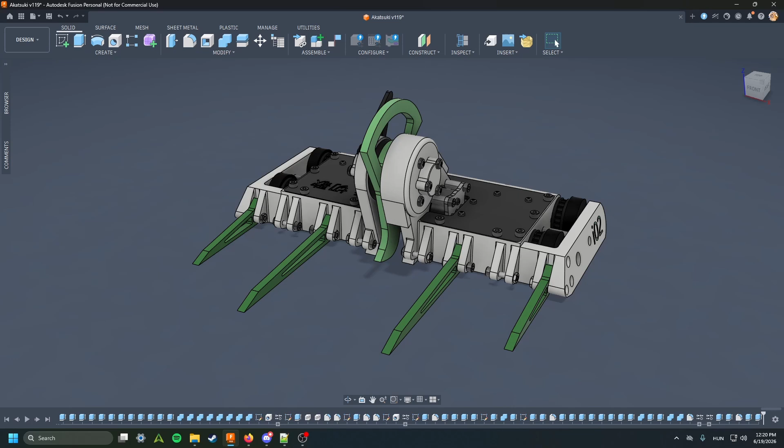Before the details, an important clarification. This robot will be competing in Europe and the United Kingdom, so it is designed to fit the 1.5 kg weight limit. It is currently in the process of being built, so everything showcased in this video is subject to change. So with that out of the way, let's get to the design.

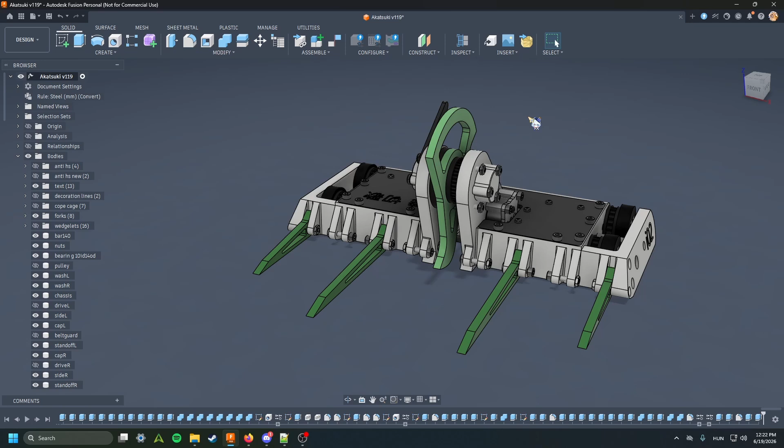Akatsuki is a 4-wheel drive vertical spinner featuring a decently wide wheelbase with a bar-style weapon. The effective diameter of this weapon is 140mm at a 6mm thickness. The material is laser-cut Hardox 500 and it features 2-axis asymmetry. Let's take a look at the weapon from a little bit closer.

Here we go. This is the weapon isolated. This is the side profile of the weapon. It features quite a big rake angle. This is to maximize bite and engagement from this weapon. As you can see also on the backside of the tooth, I have a pretty big fillet here. This is to minimize the chances of horizontal spinners catching the back of this weapon.

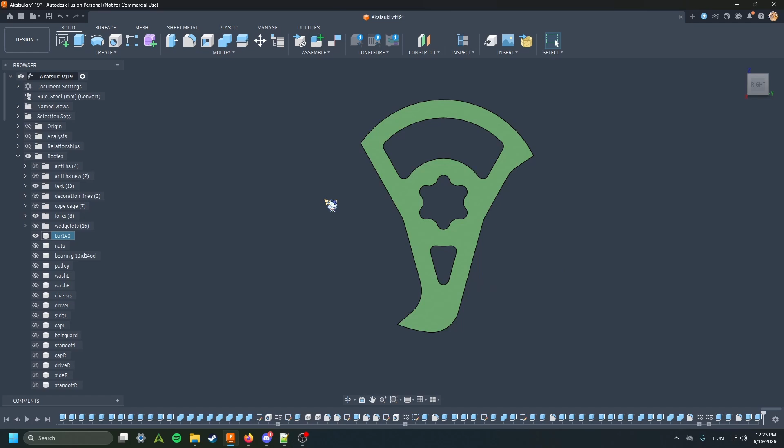Let's take a look at the rest of the bot again altogether. As you can see, the weapon sits between these two pieces here. This is a 3D printed pulley. This will be printed from nylon. Same thing here on the weapon motor. Both of these will be printed out of nylon. And this is to hold all the nuts for the 6 screws that hold the entire weapon hub together.

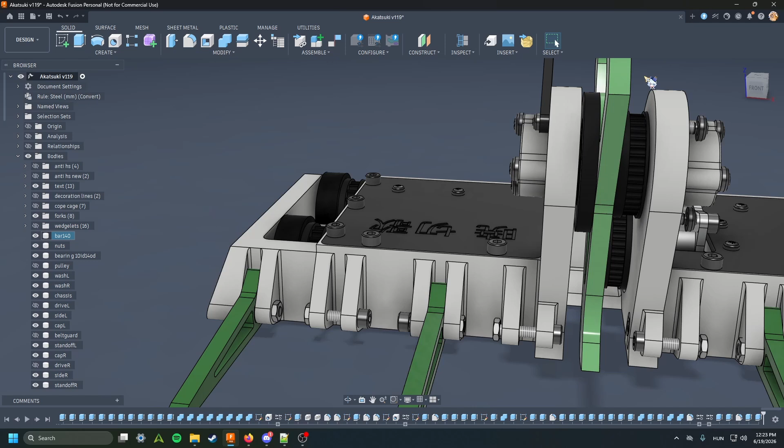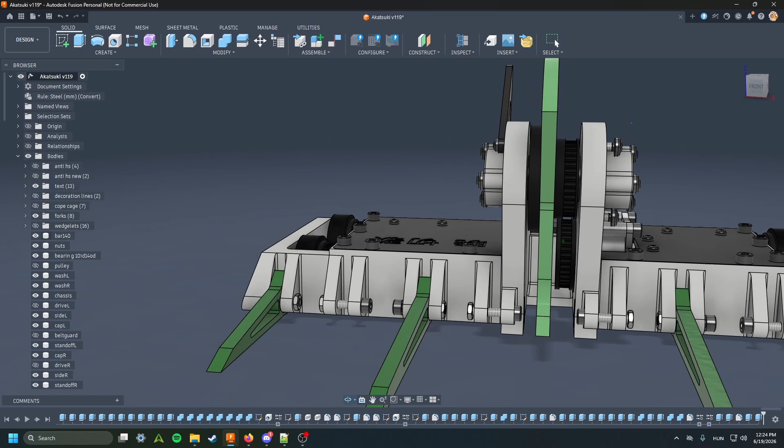Inside the weapon hub, there will be a needle roller bearing, and maybe you can see there are washers on either side of the weapon hub. The weapon will sit on a 10mm diameter weapon shaft, one that I will show off right here. As you can see, it just goes right through the entire thing, being constrained by these two caps. This is to avoid any issues with the weapon shaft potentially tearing straight through these uprights. I will talk a little bit more about the uprights in the chassis segment of this video.

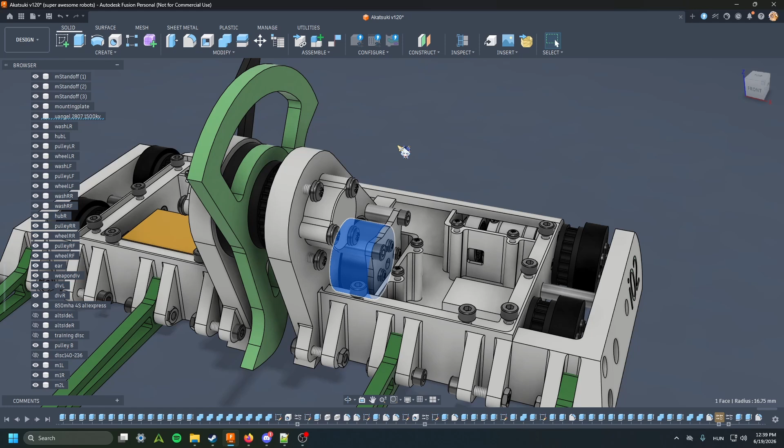Now let's take a look inside of the robot. For spinning the weapon mentioned earlier, I have chosen a U-Angel 2807 drone motor, specifically the 1500 kV variant. As you can see, it sits on this aluminum mounting plate attached to the right hand side upright by 4 of these standoffs here. Let's move on to the drive system for the robot.

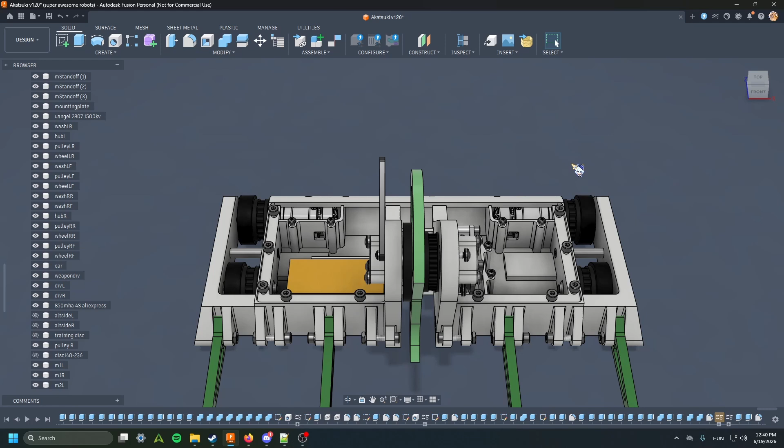As you can see, the drive motors sit here at the back, driving the back wheels directly. For the drive motors, I picked Cascadia Fabrications GXP24A gearboxes with their EC1806 motors. The 4-wheel drive system will be achieved via belt drive from the directly driven rear wheels to the front. Something quite neat that I would like to show is the set screw hub hidden inside of the rear wheel pulley. This is to maximize power transfer from the motor to the rear wheels.

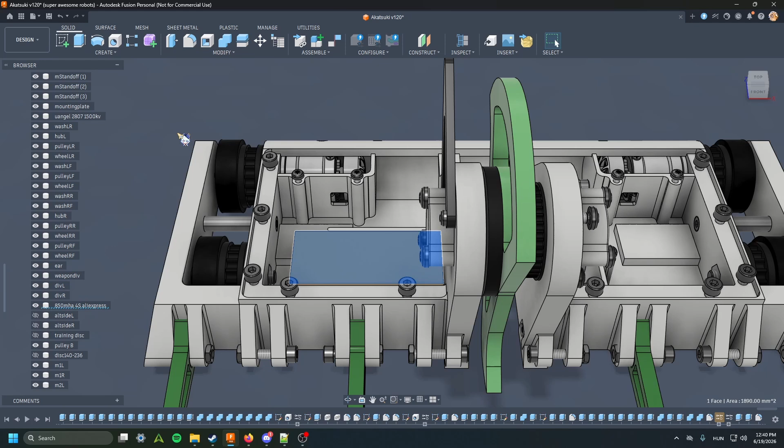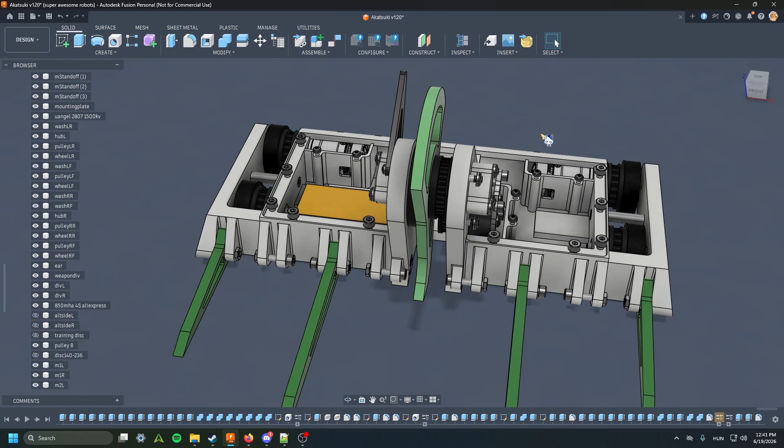For the power of this robot, I have chosen an 850 mAh 4S LiPo battery. You might notice that there is no switch, there is no link on this robot just yet. The reason for that is in here in the EU, some competitions allow switches, some competitions require links. I have not signed up for any competitions yet, so I have not decided on which one to implement for this robot. I have quite a long ways to go until I actually wire up everything and need to decide on a solution, so for now, I decided to leave that as future me's problem.

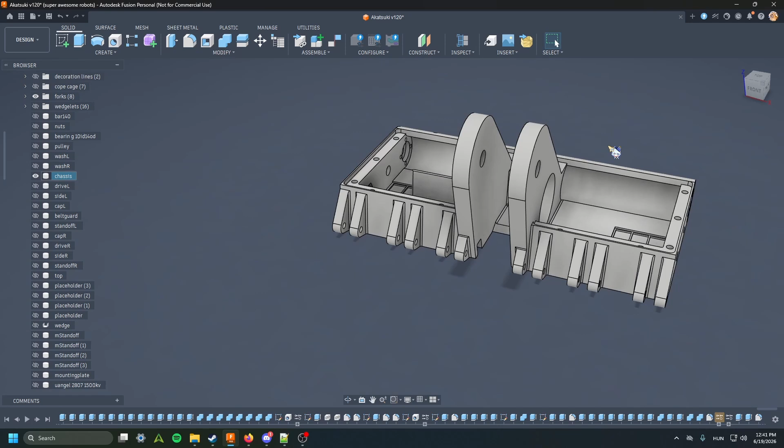Now, let's take a look at the construction of this robot. For that, I wish to isolate the chassis to talk a little bit about that. Let's give it some time. Here we go. Now, here is the chassis. It is designed to fit on the print bed of a Creality K1. That is the 3D printer that I have. This chassis will be printed out of TPU as one single piece.

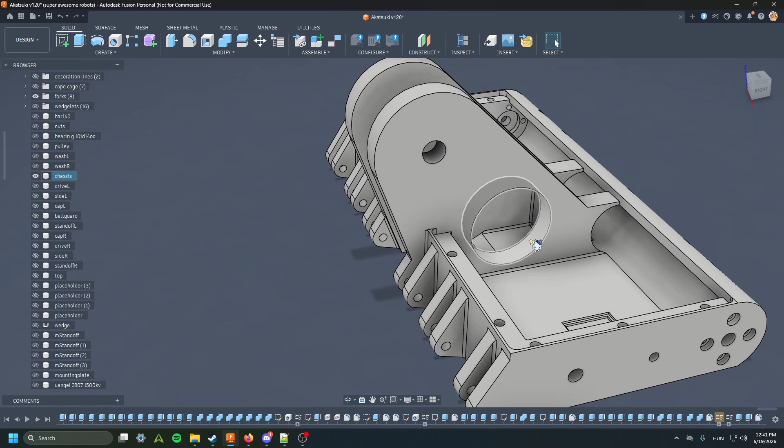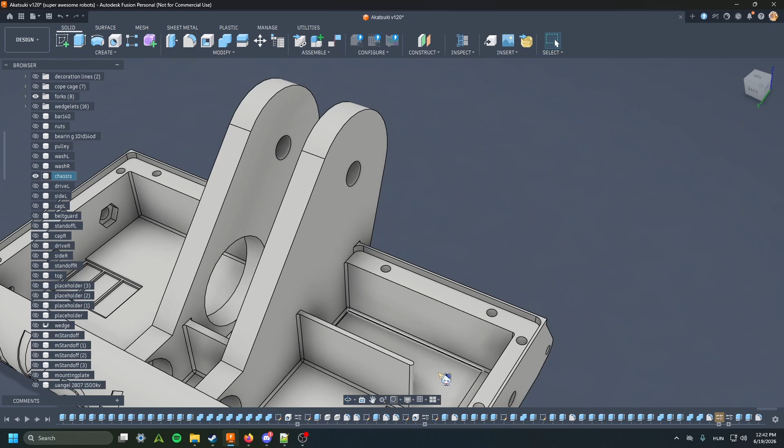Some of the features, as you can see: 3 of the 4 fork mounts here on the front, the hole in the right hand side upright for the weapon motor to pass through, space here to route wiring between the two halves of the robot, some insets here. These are for the magnets on either side of the robot. Of course, I will only run magnets if the arena floor allows me to, so no magnets on wooden floor. And a little bit of an inset for the battery itself, just to be sure that it will fit within the chassis.

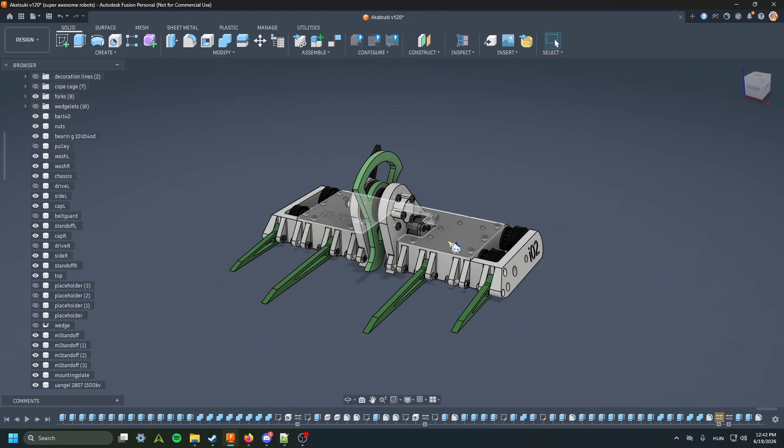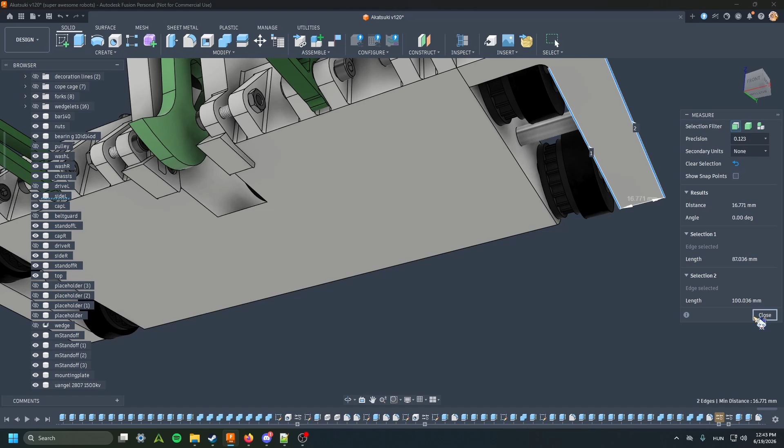Now let's turn everything back on. Top panel included. We won't be looking at the internals anymore of this robot for now. As you can see, let's talk about the armor for now. As you can see, the fork mounts are attached to the side panels. They're decently thick. Let me get you an exact value. At the top, they are 9mm thick, and at the bottom, they are 16.771mm thick. I would say that that's decent enough for a side armor on a vertical spinner.

I have a 15-degree angle on the sides, as you can see from the front, especially. This is to prevent the robot from getting stuck on its side, and hopefully to minimize bite from other spinning weapons. Another feature I would like to note here is these two removable kick plates.

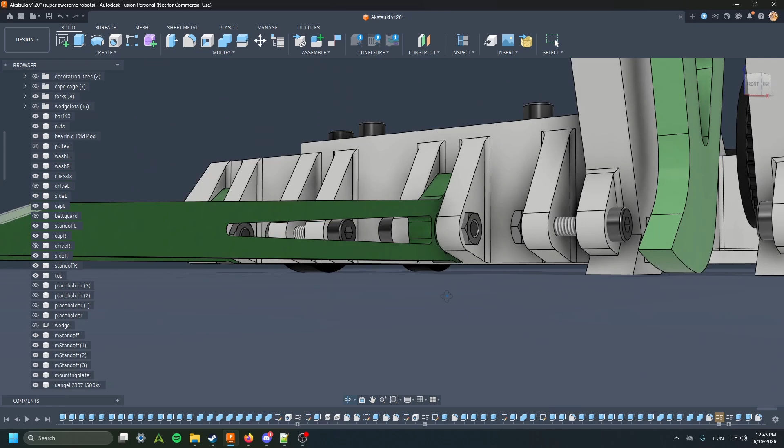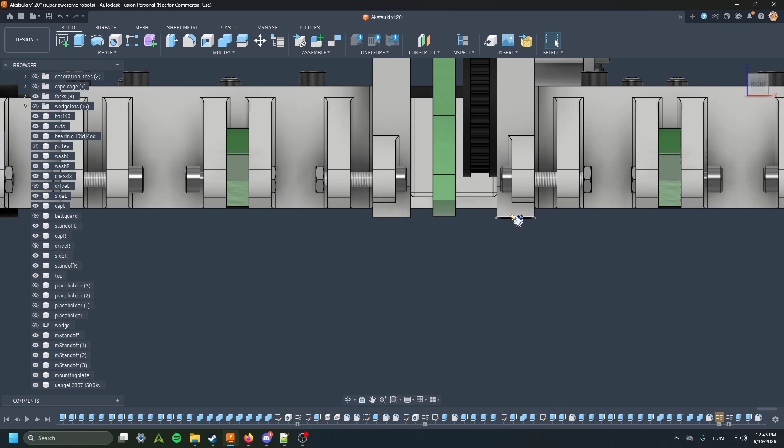These two, they're designed like that because, well, if I were to 3D print the entire chassis in one piece, that would mean that these kick plates need to be lower than the rest of the chassis, and it would need an ungodly amount of support material under it. This is the number one reason why I have picked this method for these kick plates, but also, just in case they get damaged, I can just swap in a new pair.

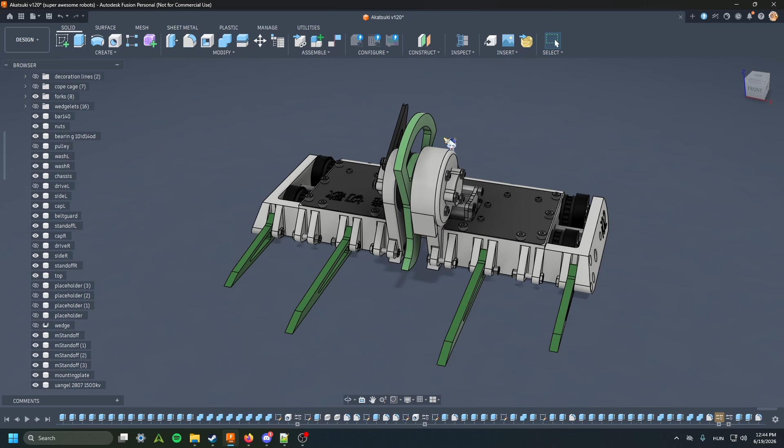Next up, I would like to go over some setups of the robot. We don't need to go anywhere just yet, as this is the main setup of the robot, only with the belt guard that might have been in the video previously.

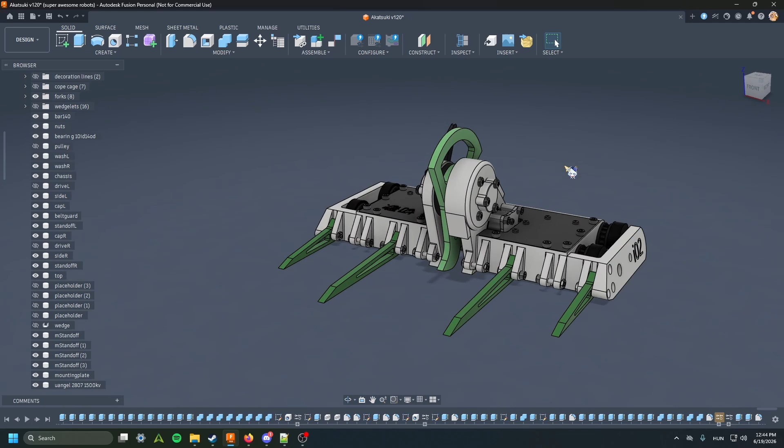So, a quick overview. As you can see, all of the setups will be featuring the same weapon, and this setup has 4 decently long forks, as you can see. Here's a side view of the forks. Yeah, they're decently long. And side armor as well. This setup is meant to fight pretty much any other vertical spinner, egg beaters, drums, anything like that.

Do note that these forks can be arranged in any variation. Another disclaimer here is that I don't have the exact amount of weight I have left for forks. By my calculations, 4 I should be able to get away with. If I have weight for more, of course, that will leave the option to run more forks open for me.

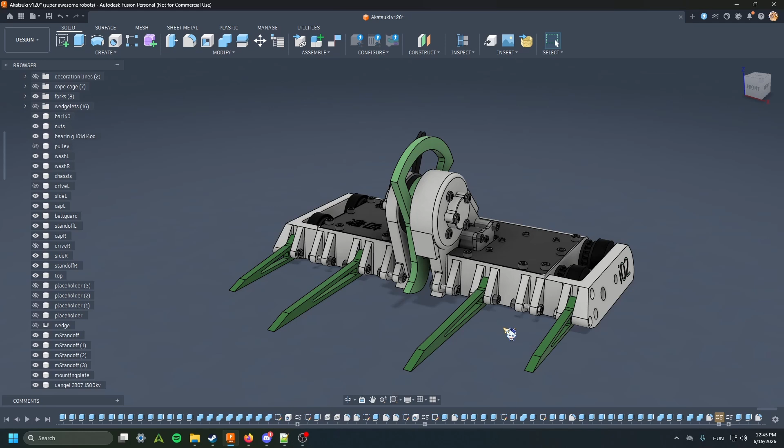Next up, this setup is for fighting control bots. This setup gets rid of the belt guards and the side armor. Of course, I would get rid of these standoffs and these screws as well, but we are in CAD, we can leave them for now.

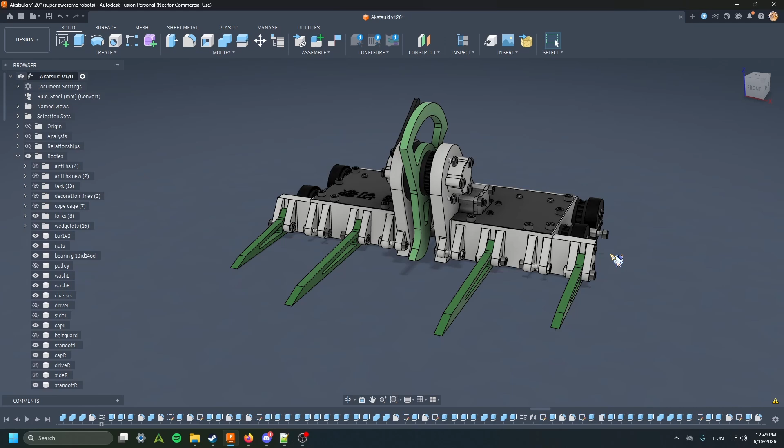This setup retains the ability to have the maximum width mounts for the forks, while freeing up some weight for potentially more ground game. Against control bots, side armor is not only unnecessary, but it can get the robot stuck in rather unadvantageous positions, so I solved that issue by getting rid of the side armor completely. If I were to fight a top attack robot such as a hammer or a hammer saw, I could keep the belt guard on to keep my belt safe from those top-down attacks.

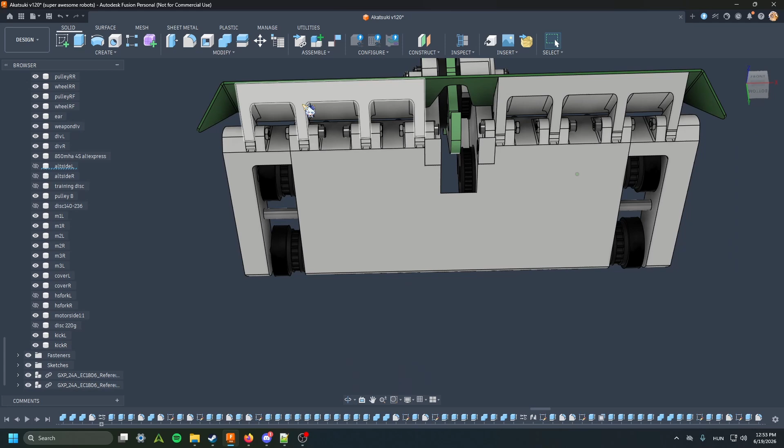Next up, the anti-horizontal setup. It has quite a big wedge in the front, is rather wide, covering the full width of the robot. And it has a lot of screws attaching it to these 2 TPU blocks underneath it, which just slot into the fork mounts.

And there is a pretty neat trick that the setup can do. It could have some sacrificial forks just in case I'm fighting a horizontal that happens to have some ground game. These are not the actual forks I would run, I just had them here as a bit of a proof of concept, but it does the job to illustrate what I mean.

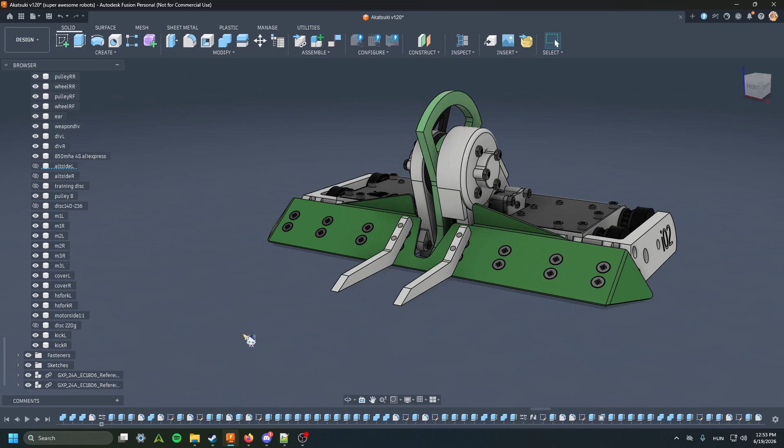Next up, my full face piano key setup. It's 2mm steel plates screwed into TPU mounts. These mounts are meant to be TPU, and they're meant to be even more flexible TPU than the chassis is. Well, hopefully a lot more flexible TPU.

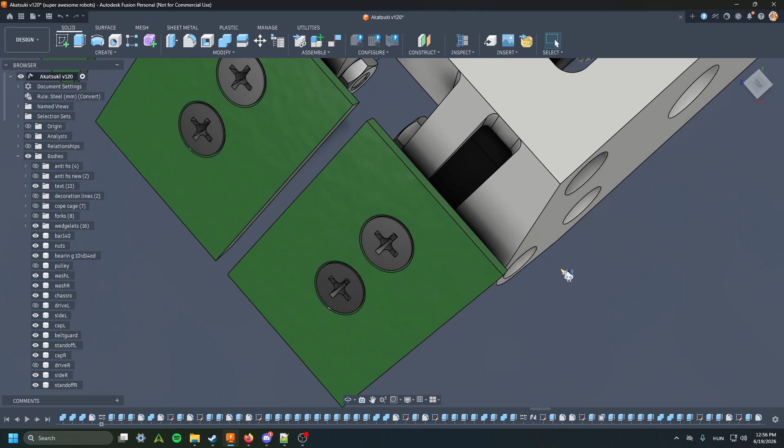And you might be able to see, if I go into top-down view, that it is clipping into the chassis here. That is to make sure that the TPU would bend and put as much pressure on the front of the wedge that's here as I can, because ground pressure matters a lot for ground game. Hopefully this would give me a bit of an advantage when it would come to that.

This setup will not be made just yet. It would require a lot more laser cutting and a different type of TPU filament that I do not have right now. If I were to build this setup, I would use this against robots that have long forks, probably with robots that have long TPU forks as well, maybe even TPU wedges. Anything that I feel wouldn't have as much ground pressure as these piano keys would.

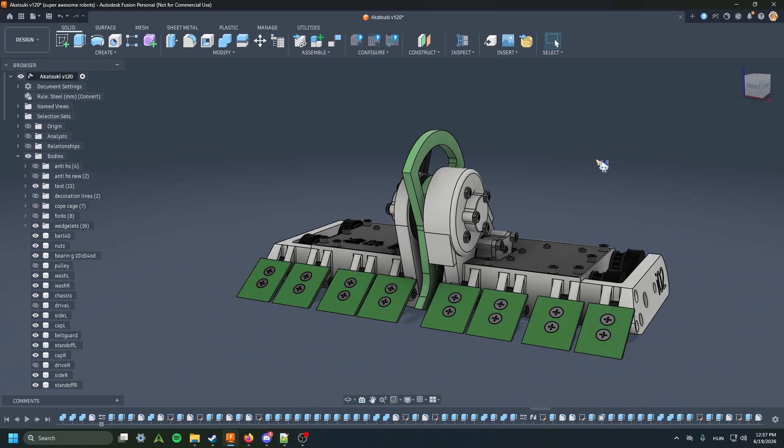These piano keys have a pretty big advantage of being able to be combined with forks from previously shown setups. Also, the side armor can be lost in favor of the normal lightweight fork mounts, so this would work, I feel, pretty decently against control bots as well. But as I said, for now this setup only remains in the CAD.

Now for some closing thoughts on this project so far. Ever since I learned about combat robotics, I wanted to design my own machine and compete. This robot is currently in the process of being built. I will make a video on the process and my experiences building it once it's done. However, do note that this will probably take quite a bit of time.

I am building this bot in my free time. I don't have any deadlines, I have not signed up for any tournaments just yet, but rest assured, the moment it's ready, I will be there no matter what.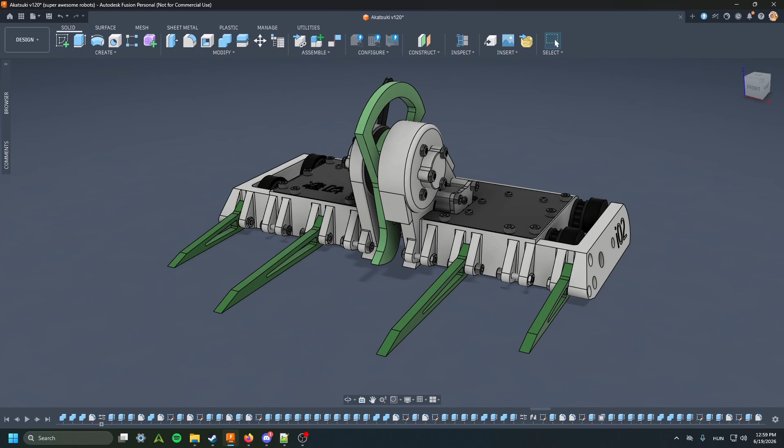As a final note, I would like to mention 2 robots and a channel that inspired me the most during the design process. Fragment X from Shadow Combat Robotics and Endgame from Robot Rampage. As well as Team Embarrassing Engineering, whose videos helped me get started with designing this robot. I left links for all of these channels in the description.